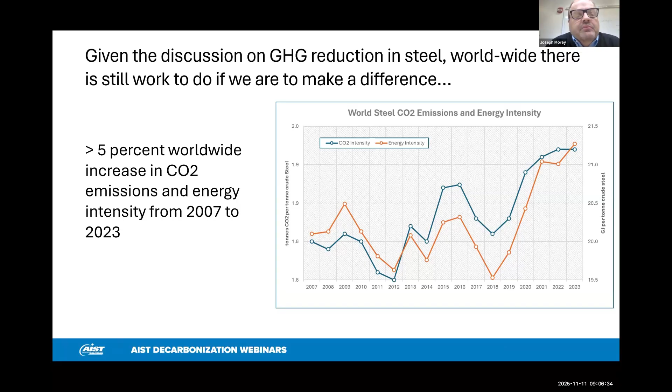Go to the next slide. So it seems that there's a strong blast furnace footprint for ironmaking. Over 70% of the world's steel comes from traditional blast furnace routes, and blast furnace capacities continue to come online.

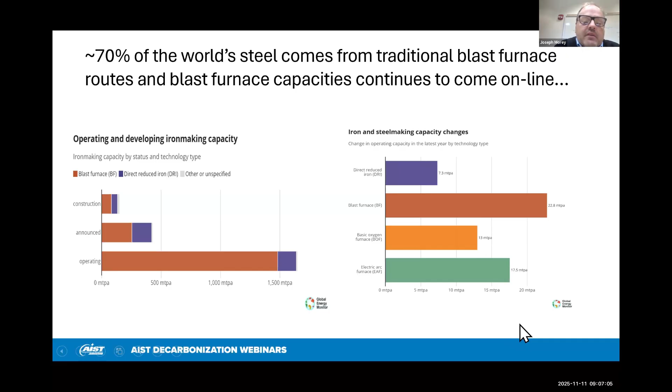Can you go to the next slide, please? As you can see here, in North America and Europe, blast furnaces are shutting down, and in parts of Asia, blast furnaces continue to come online, and it just continues to balance out at around 70%. That figure has been stable for the past 10 to 15 years.

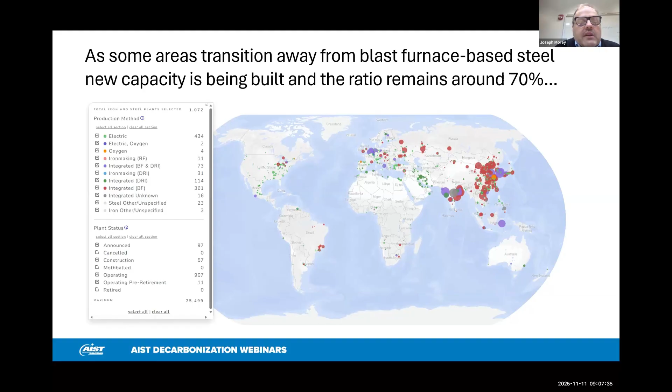Go to our next slide. So today, we're going to talk about the second part of our series where we talked about this pathway before. Now we're going to be focused on the boiler house, blast furnace, and steelmaking area on what exactly we can do to reduce our carbon footprint, which is the biggest lion's share of the carbon emissions.

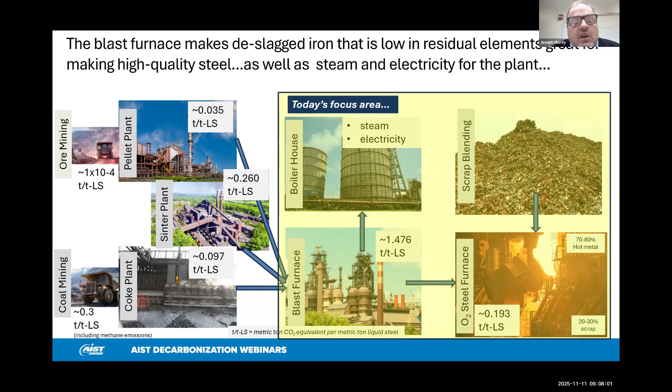Thank you, Joe. You summarized very succinctly the current dilemma that although we are looking at new processes that are going to be zero net carbon, the blast furnace process continues to predominate, and we need to do something about it right now rather than waiting for another 20, 30 years.

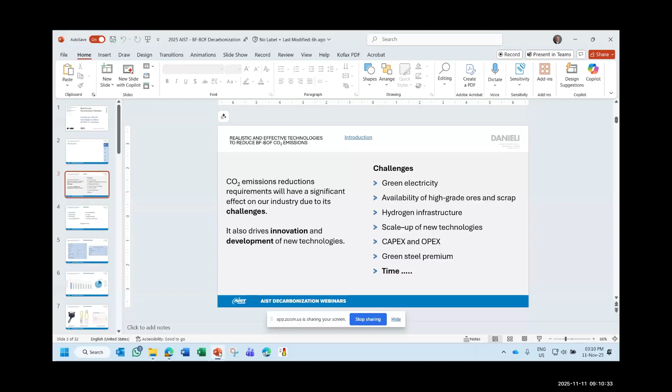Ladies and gentlemen, thank you for attending this webinar. I have the honor to share the first presentation today, Realistic and Effective Technologies to Reduce Blast Furnace and Basic Oxygen Furnace CO2 emissions. Within this first presentation, I will actually cover 5 different sections.

It's my pleasure to first start with a general introduction into the remainder of this presentation. I think we're all in agreement that any CO2 emissions reduction requirements have a significant impact on our industry, mainly due to their challenges. But at the same time, the silver lining is it also drives innovation and development of new technologies.

Nonetheless, I would like to summarize some of the challenges being faced by our industry for decarbonization, such as limited availability of green electricity, constraints in the availability of high-grade iron ores and scrap, and limited availability, if any at all, of hydrogen infrastructure. We cannot ignore the risk and challenge of scaling up any new technologies—this simply takes time in our industry. CapEx and OpEx economics, and also the green steel premium.

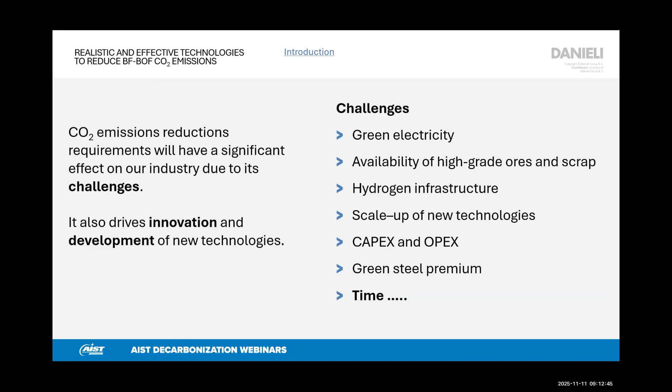And last but not least, as the moderators already explained, we are running out of time. We cannot wait for new emerging net zero technologies, but realistically this will take another few years. Within our organization, we are convinced that a significant part of steelmaking for the coming decades will comprise basic oxygen furnaces and also blast furnaces, which is why we are determined to assist the industry in decarbonization of blast furnace and basic oxygen furnace.

For this reason, we started an internal assessment a little while ago to assess the impact and effect of different technologies that could be used for decarbonization of blast furnace ironmaking and basic oxygen furnace steelmaking. For this purpose, we set up a rather comprehensive spreadsheet model, which includes all of the main facilities of a typical integrated iron and steel making plant, such as sinter making, pellet making, coke making.

Also ironmaking, either by blast furnace, but also potential new direct reduction plants on site or remote. Steelmaking by means of basic oxygen furnaces, casting. And the spreadsheet model also includes oxygen and steam, and last but not least, electricity and hydrogen.

Any usage of hydrogen does matter, because we have been assuming that any hydrogen would realistically be made by contemporary electrolyzers connected to the grid. The electricity grid carbon intensity these days is generally anywhere from 300, 400, 500, 600 grams of CO2 to produce 1 kilowatt hour. We cannot ignore those emissions, as there's simply not enough green electricity as we speak to service the steelmaking industry—maybe on the longer run using nuclear energy or other sustainable energies.

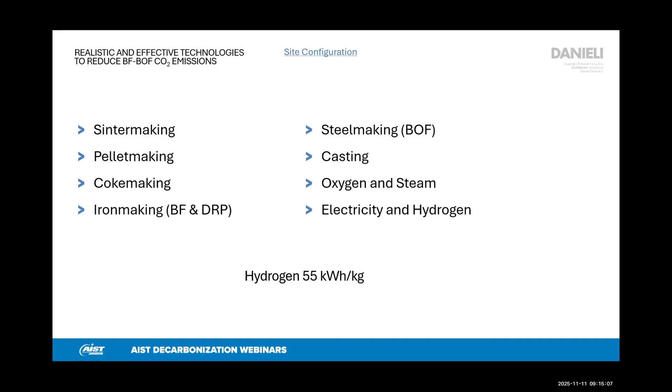That could be exported after some of this electricity is used within the plant. We have actually been looking into a typical large blast furnace with a coke rate of 340, a little conservative number, and a coal injection rate of 180. I would say the other key KPIs are rather reasonable.

Within the spreadsheet model, we've actually been using the detailed results of our thermodynamic blast furnace steady state heat and mass balance model. But we've also been assuming realistic constraints, as these are commonly accepted in our industry, on minimum coke rate, minimum top gas temperature, and RAFT for using PCI or natural gas.

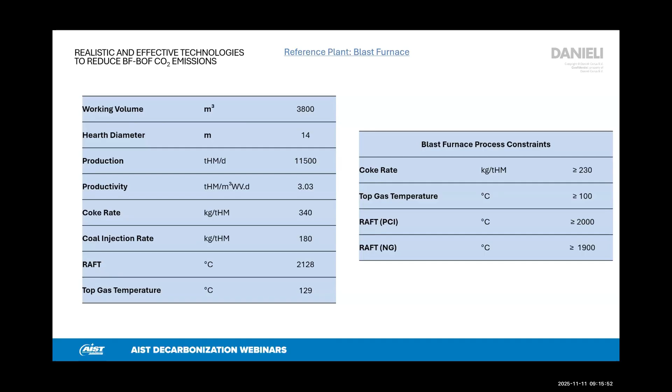If we would then add up all of the emissions of sinter making, pellet making, coke making, etc., then the total emissions of this reference plant would add up to a number of around 2067. And we need to knock down this number.

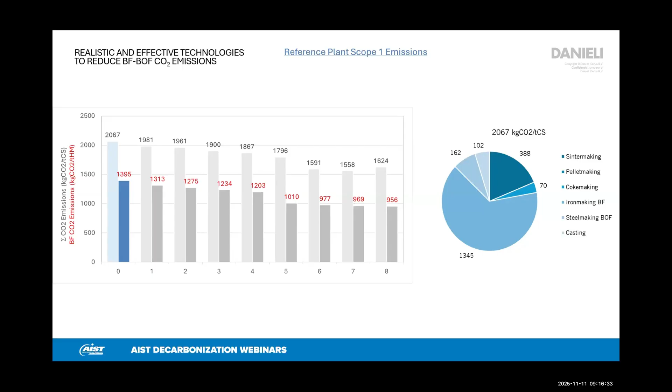Within the remainder of the presentation, we will take you along on our journey by analyzing 3 different technologies to reduce those crude steelmaking emissions to less than 1,600. By the end, I will also share a forecast, because that number could be even more reduced in another few years. How could the number of 2067 kilos of CO2 be reduced right away?

There are 2 methods to reduce these emissions right away. That is, first, to implement best available technologies. 3 such examples are summarized on this slide, which is a modern charging unit to reduce the coke rate by more optimum burden distribution and maximize the gas utilization.

The second is to adopt modern hot blast stoves with a hot blast temperature of 1,200 degrees centigrade instead of the more conservative 1,100 degrees centigrade. And last but not least, by implementing modern state-of-the-art automation level 2 systems, including, as an example, heat flux monitoring to reduce the heat losses by gas flow along the reactor.

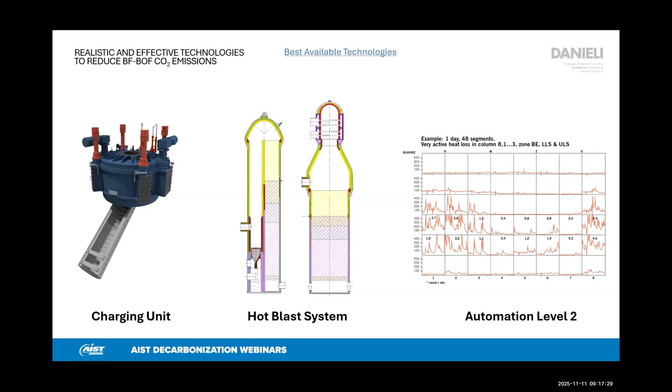Second, right away, the industry can further optimize efficiency and yield of blast furnace iron making and basic oxygen furnace steel making. Some 5 examples that we came across in steelmaking companies are summarized on this slide.

For example, minimizing the burden moisture and raw fluxes, maximizing the yield and recycling of fines and reverts, maximizing hot blast temperature also by using energy-saving tuyere stocks and tuyeres.

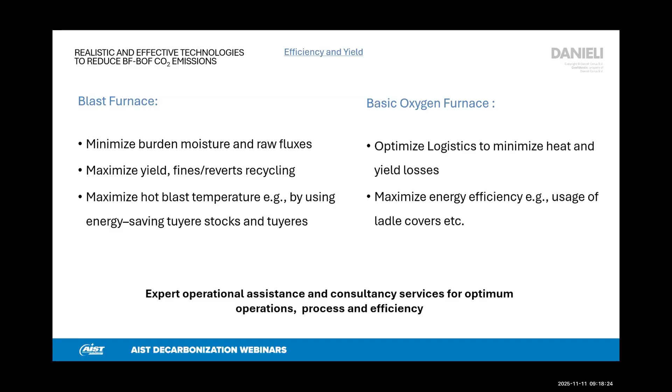And when we look into basic oxygen furnace, we have come to realize that many steelmaking companies could actually optimize their logistics to minimize the heat and the yield losses, and also to maximize the energy efficiency, for example, by usage of ladle covers. If the best available technologies and some efficiency and yield improvements are being factored in, then emissions will be reduced already by some 5%.

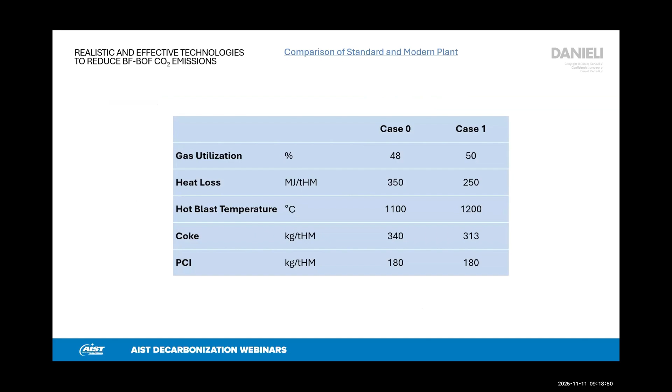As a result of improving the gas utilization, reducing heat loss in blast furnace, increasing the hot blast temperature, this will reduce the coke rate whilst retaining the PCI rate. And by reducing the coke rate, overall carbon emissions will be reduced to a level of approximately 1,981 kilos of CO2 for 1 ton of crude steel.

This modern reference steelmaking plant is actually a net exporter of electricity of around 134 kilowatt hours for each ton of crude steel, by nature of combustion of any excess blast furnace gas and coke oven gas, and use of that heat to generate export electricity.

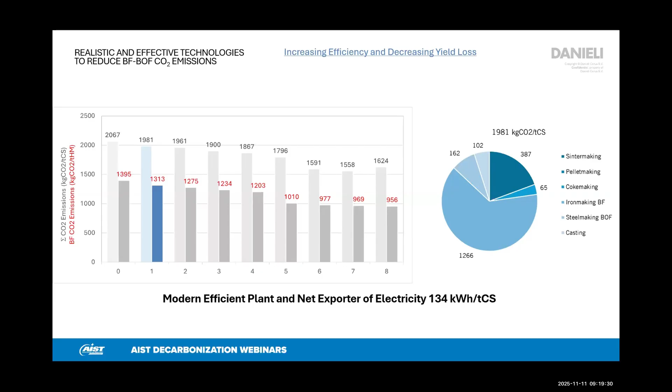Now, let us look into one potential technology to reduce the CO2 emissions, which is usage of gas injection. We have been analyzing 3 different types of gas injection.

The first, already practiced in the United States, also in Russia and 1 or 2 other countries. We could look into usage of natural gas, and we've been assuming this is constrained by a maximum amount of approximately 100 kilos per ton of hot metal, and it would actually rule out usage of PCI.

Second, we've been assessing the impact of using coke oven gas instead at a moderate rate of 40 kilos for 1 ton of hot metal, and another 180 kilos of PCI. You may wonder, why 40?

Well, we have come to realize that the availability of coke oven gas on its own is limited by the coke making plant. Some coke making plants may produce more coke oven gas, others may produce a little less, but we believe that a moderate average number for our industry would allow usage of approximately 40 kilos of coke oven gas for each ton of hot metal, as we also need to use minor amounts of coke oven gas for enrichment in hot blast stoves, but also for heating in the reheat furnaces.

We've been looking into usage of hydrogen, and we have been assuming a moderate, reasonable rate of some 20 kilos of hydrogen for 1 ton of hot metal. Two industrial plants in our industry have already demonstrated usage of hydrogen in excess of 10 kilos on industrial facilities, and experimental blast furnaces have demonstrated capability to inject much higher levels, even beyond 40 kilos. But there are some setbacks of doing this on the heat balance, so we've been assuming a moderate amount of 20 kilos.

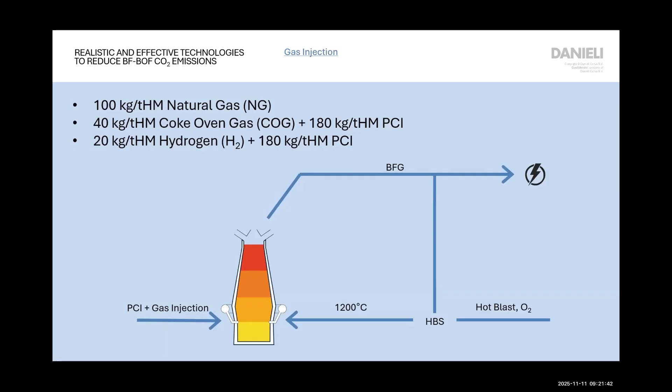Let us first look into the KPIs of the blast furnace when comparing natural gas, coke oven gas, and hydrogen. The coke rate for injection of natural gas is relatively high because we nullified coal injection rate to allow maximum usage of gas. The coke oven gas coke rate and the hydrogen coke rate are less than our reference blast furnace, meaning CO2 emission reductions will be accomplished. For reference, the reference blast furnace plant had a coke rate of 313 kilos.

More interestingly, let's look into the impact to the electricity balance. The potential export of electricity will double when injecting natural gas, because more blast furnace gas at a higher calorific value will be produced. The export of electricity will be reduced to only 32 kilowatts when injecting coke oven gas, because there would be no more coke oven gas for combustion in the power plant to produce electricity. Far worse is actually the electricity balance when injecting hydrogen - then we would need to factor in usage of more than 800 kilowatt hours to produce 1 ton of crude steel by means of injecting 20 kilos of hydrogen.

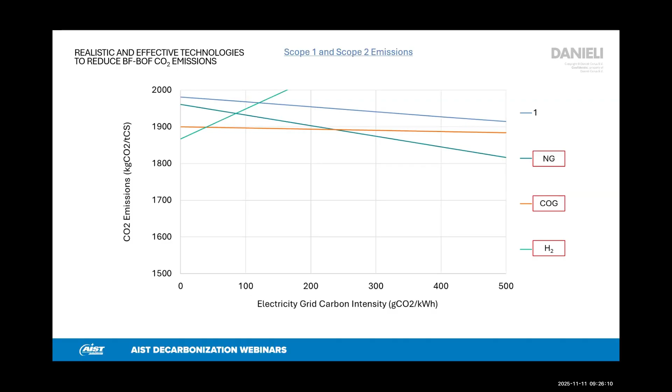Let's look into another group of technologies which includes charging of metallics in the blast furnace. I deliberately refer to metallics. What are metallics? Metallics could be DRI, HBI, even scrap. Metallics could also include briquettes if they are mainly made up of iron reverts.

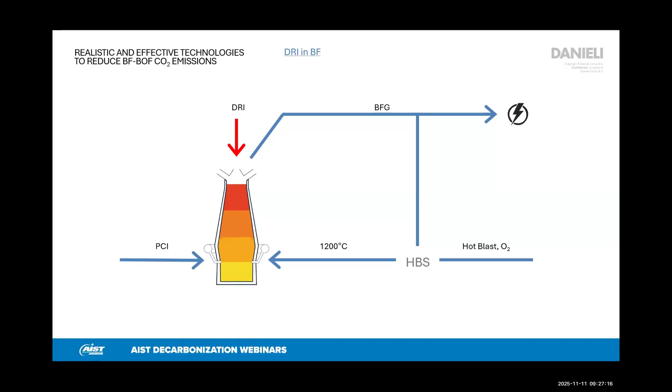We've been looking into different scenarios of charging metallics in the blast furnace, and within this presentation we will focus particularly on charging DRI. The examples I'll share in the next few slides assume 30% of the burden comprises DRI. There's a good reason to limit this number to 30% - we've also made calculations for 40% and beyond, but I will explain later why we've been looking into the 30% scenario, as we believe this is the most realistic these days.

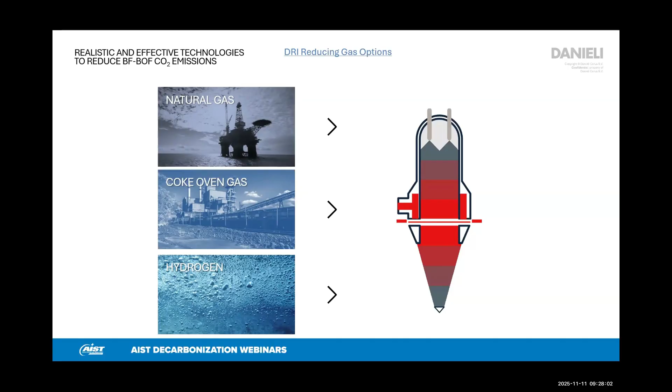DRI is made in a direct reduction plant, as we're all aware, and most DRI these days is actually made in shaft furnaces, which could include, for example, Midrex technology. This technology could use either natural gas, coke oven gas, hydrogen, even syngas, and I would say any blend of those gases. For simplicity, we are ignoring the usage of syngas, so in the next few slides we will only look into using either 100% natural gas, 100% coke oven gas, or 100% hydrogen.

Usage of coke oven gas for the production of DRI is actually not new. I would like to bring two examples to your attention. Those are two of the most recent industrial demonstration plants, which were commissioned and are currently operating in China to produce 0.5 million tons of DRI per year and 1 million tons of DRI per year using coke oven gas. So the usage of coke oven gas to produce DRI on its own is not new, but the industrial scale is emerging fast in China as we speak.

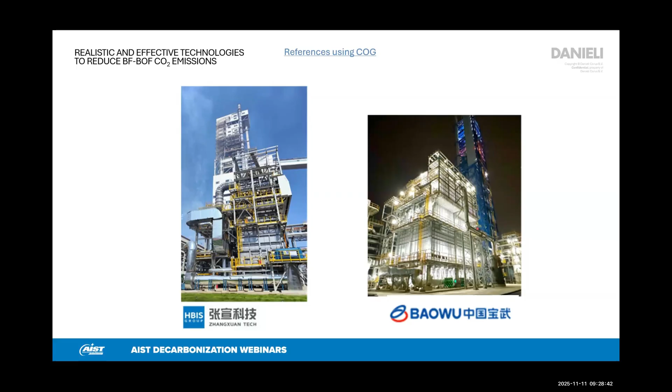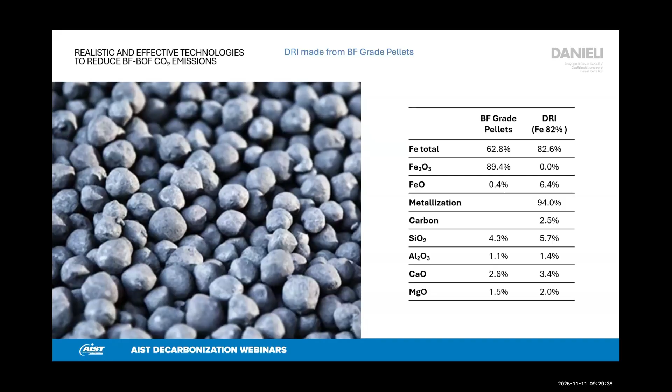We know that high-grade ores are limited in availability, so ideally our industry would use lower-grade ores. This is actually very attractive when charging this DRI in the blast furnace. We have been looking into the usage of BF-grade pellets to produce a DRI with a lower iron content, compared to an alternative scenario using DR-grade pellets, which would produce DRI with an iron content of more than 90%. So this DRI is, I would say, sort of low-grade DRI. It has moderate metallization, but a relatively high amount of gangue components. We can charge this in the blast furnace because the blast furnace is the ideal smelter.

Let us again look into the KPIs of the blast furnace when charging either DRI made by natural gas, DRI made by coke oven gas, or DRI made by hydrogen. You can see a coke rate reduction similar for all three scenarios. We reduced the coal injection rate somewhat, mainly because we would then produce a little bit more coke. We also didn't want to violate the lower limit to the coke rate, which I already shared before. The more coke we charge, the more coke oven gas we could produce, and this balances out to the 30% I've already mentioned. So if more coke oven gas were available to the industry, the 30% we've been assuming could be raised to 35, 40%, even beyond. But in reality, there are limits to the availability of coke oven gas.

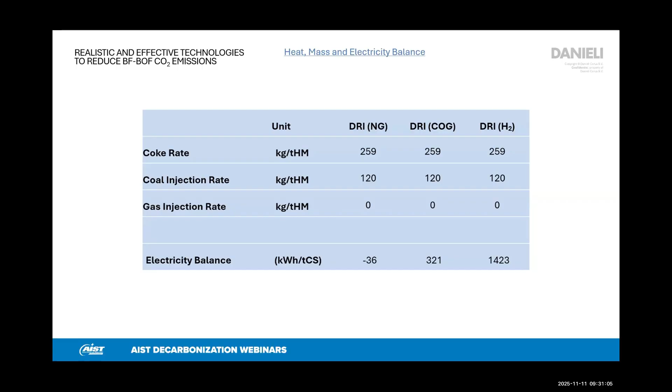If we look into the electricity balance, it's still a minor export when DRI is charged using natural gas. We need to import electricity when the DRI is made by coke oven gas, because all of the excess blast furnace gas would be used for the direct reduction plant process gas heater. But the amount of electricity needed when using hydrogen is really very, very significant.

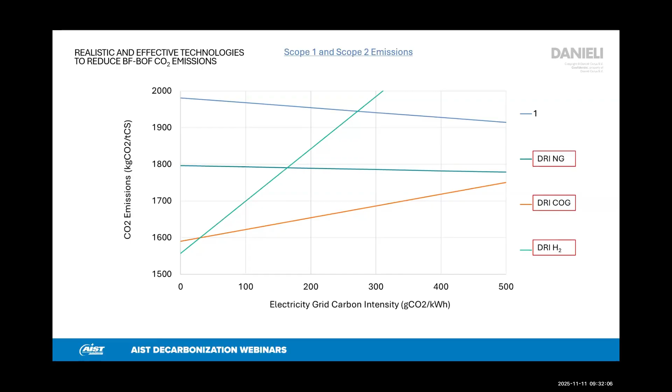Last but not least, we have a few minutes left. I would like to make a simple comparison to alternative top gas recycling technologies.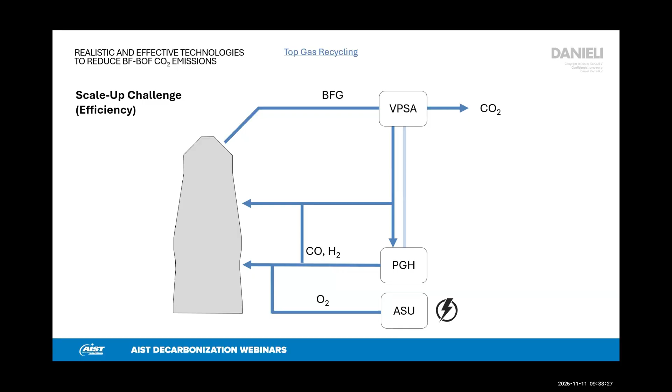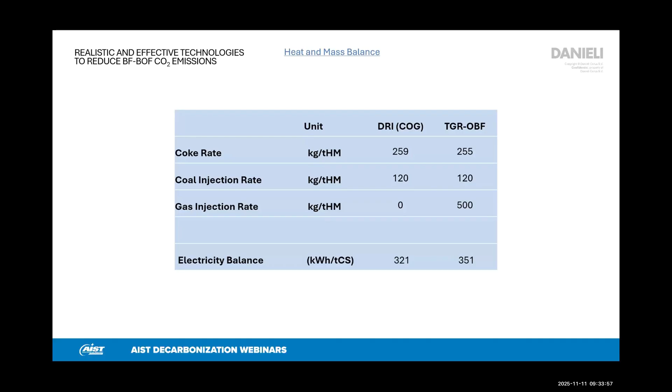Until top gas recycling is demonstrated on industrial scale, we cannot reliably predict its efficiency, so we've assumed a moderate efficiency as reported in the industry. Comparing the KPIs of the blast furnace and electricity balance, the coke rate of the 30% DRI option made by coke oven gas and the top gas recycling option were comparable. The electricity balance was also somewhat comparable, and the CO2 emissions for scope 1 and scope 2 were also comparable. We believe charging DRI using coke oven gas or top gas recycling oxygen blast furnace have similar impact on reducing CO2 emissions.

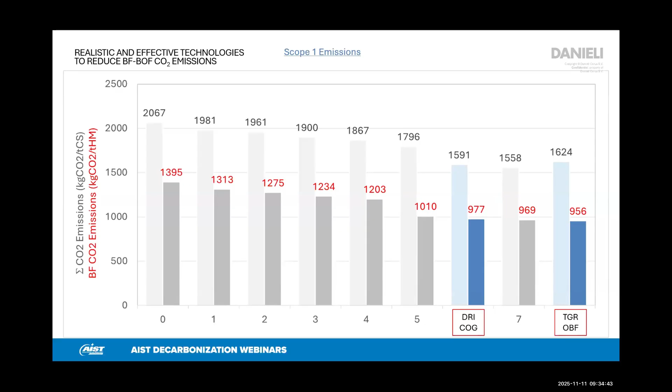But charging the DRI is already demonstrated on industrial scale. There's no new technologies, no scale-up risk, whilst those do exist for top gas recycling oxygen blast furnace. This is the main reason why our current strategy focuses on charging DRI, although we are not ignorant of the potential of top gas recycling oxygen blast furnace.

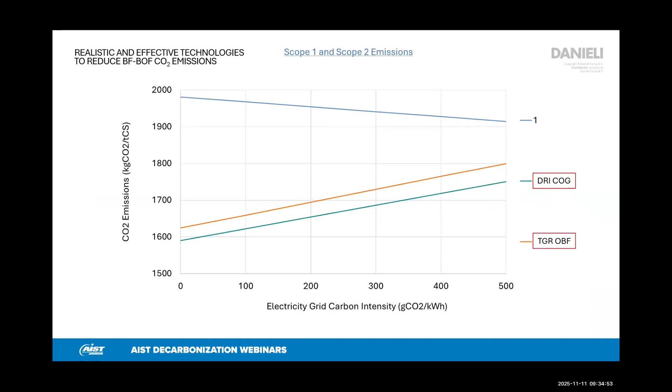We can also compare the scope 1 and scope 2 emissions, and the two lines are somewhat comparable. I'd like to end this presentation with some conclusions. We believe that realistic and effective technologies must be deployed right away, if not in the next 3, 4, 5 years. Those should include application of best available technologies, maximizing efficiency, maximizing yield.

Second, if gases would be injected into the blast furnace, ideally coke oven gas would be injected to reduce CO2 emissions. Third, more significant emission reductions could be achieved by charging DRI made using coke oven gas and also using low-grade iron ores. This altogether would actually rule out the need for hydrogen.

There's no risk in scale-up. We can use low-grade iron ores and continue to produce high-grade steel in the basic oxygen furnaces. This is why I believe these are realistic solutions to reduce emissions.

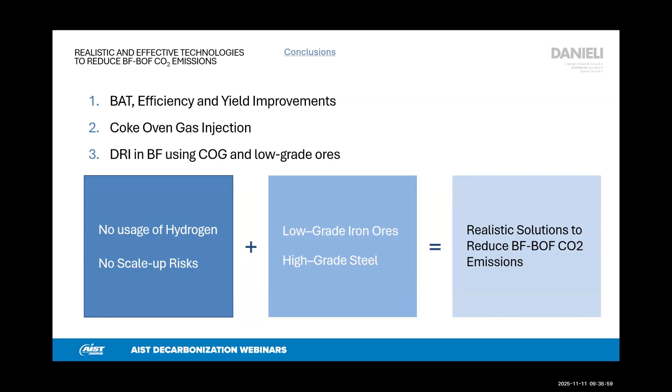Last but not least, I've just been sharing a few examples. In reality, we're already aware of the potential of raising metallics in the blast furnace to 40%, as demonstrated in Japan as we speak. We're also looking into maximizing metallics in converter steelmaking to 40%. If we add one to the other, an overall CO2 emissions reduction of 40% could be accomplished. There are some other trick cards we could add to reduce those emissions to less than 1,000.

This is a very good question, I can only give a very generic response. Any technology we've come to realize will raise the cost of crude steel. That is only feasible if either CO2 emissions would be penalized or if CO2 emissions reductions would be awarded by a green steel premium. It's not yet entirely clear to us which of these technologies would be most economic. For sure, investment into top gas recycling oxygen blast furnace and all the auxiliary plants is somewhat comparable to investment into a new direct reduction plant, which is a mega number. Capital investment into any gas injection technologies is, I would say, rather moderate. I hope that answers the question for the moment.

Thank you very much, Joe. Thanks everybody at AIST for organising this. I will see if I can get the video going. Good, you should be seeing the full screen now.

So, yeah, as I say, thanks to everybody. Gerald and I will be presenting on BF and BOF decarbonisation with an emphasis on what can be done from a CO2 perspective, but also trying to give it an economic viewpoint without breaking any rules of sharing information we're not allowed to share. We'll try our best not to repeat previous webinars, but I guess not surprisingly there'll be some alignment with today's presentation from Reinoud—a bit of corroboration, perhaps.

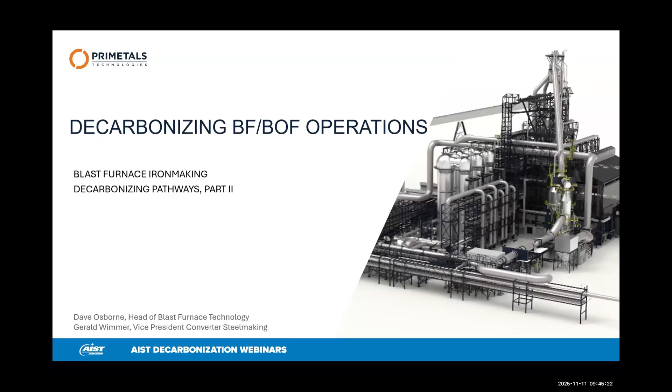So I'm going to start the presentation. I'm going to talk about the blast furnace, then I'll shift across to Gerald, and he'll talk about the BOF. Then we've got a summary slide at the end that I'll come back to.

So slide 1 is remarkably similar to one of Reinud's previous slides, so I won't dwell on it, but just to re-emphasize that the blast furnace is the big emitter in the liquid steel route, and is therefore both a challenge and an opportunity in the short term.

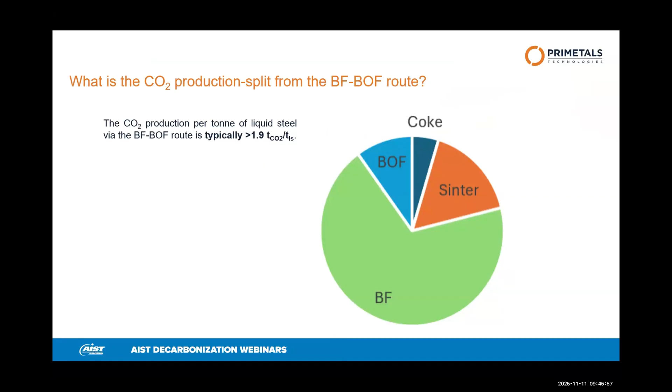While preparing for this webinar, one of the questions Joe Morey asked us was, what is a good blast furnace? I had to think about how to answer that. For me, some operators will be lucky enough to have very modern furnaces with the latest facilities and benefits I'm going to talk about, but most people listening will probably have older existing assets and might be asking what they can do. So I want to talk about not what is the best technologically available blast furnace, but what helps with OPEX and CO2.

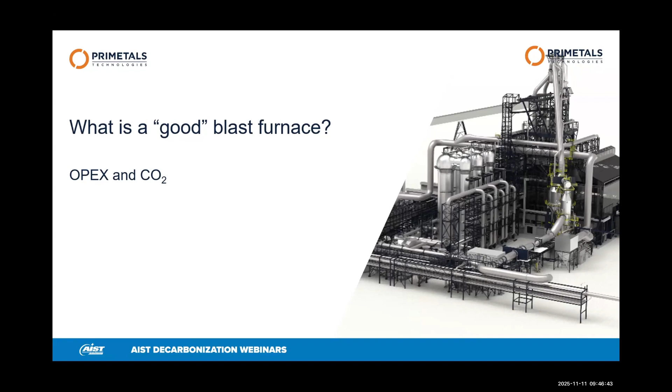So what is a good blast furnace? I made a list of some items. But first, what does a blast furnace do? We have to be honest, the value add in the blast furnace is nothing like the downstream technologies.

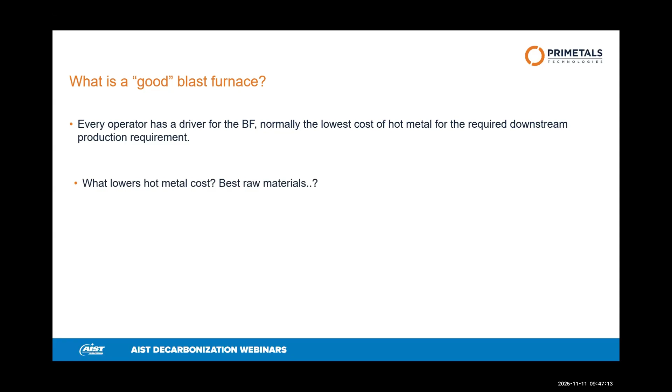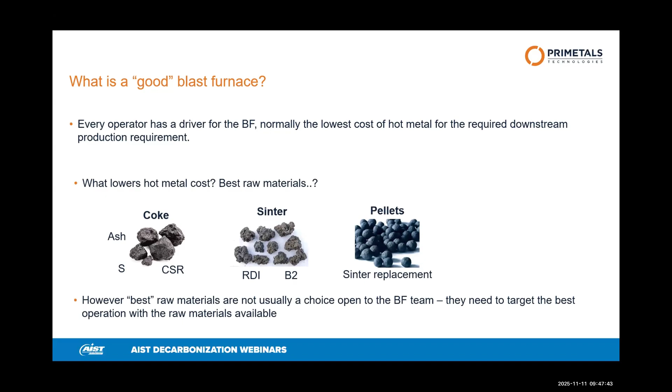So what we're normally trying to do is produce the lowest cost hot metal for use downstream. What lowers hot metal cost? Best raw materials, clearly. Can I have the finest coke? Can I have the world's best sinter? Can I have the best pellets, etc.? But frequently the best raw materials are either not a choice open to the blast furnace team, you're at the vagaries of the procurement team, or available qualities are coming down. So what we need to do is target the best operation with the raw materials available.

The next slide talks about some technological activities which can be used to both reduce hot metal cost and CO2. I won't go deeply on this slide - I've got another slide where I'll talk them through more - but it's not an exhaustive list, I'm sure. These items, if utilized correctly, are all going to help reduce your OPEX. Because such a large percentage of the cost of running a blast furnace is the fuel, the carbonaceous fuel, most of these activities - in fact all of them in this case - are going to bring the CO2 level down as well.

So: maintenance to maximize your availability and minimize the time when the furnace isn't running efficiently. Bellless top for burden distribution. Level 2 optimization system, blast temperature, maximizing your blast pressure, or top pressure, within your available constraints. Top gas energy recovery turbine, the TRT, if you've got enough pressure. Avoiding gas flaring, and the SIP oxygen pulsing, which I will explain briefly later on, a relatively new technology.

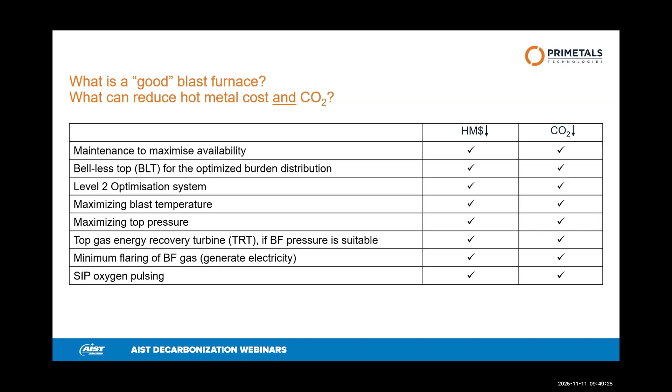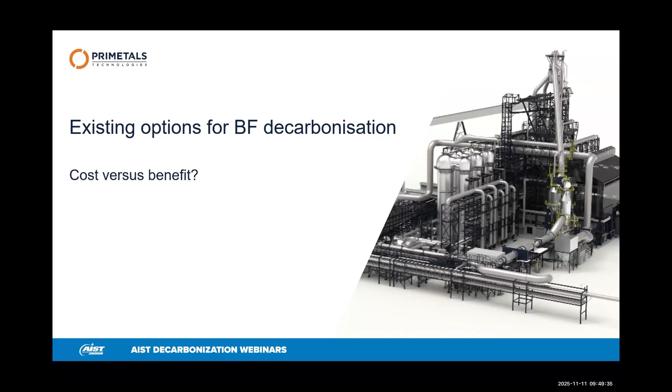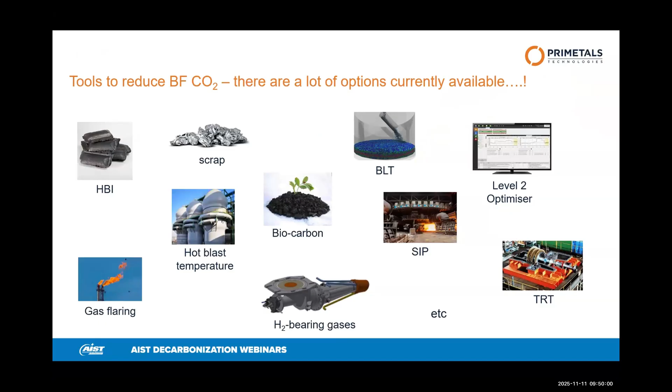What's important, I think, is then to talk about them individually and maybe try to rank them. And in trying to rank them, how do you do that? So I've put a series of technologies on the left-hand side here, and I'm going to, again at a high level, try to rank them on OPEX, operational cost, CAPEX - that's the capital expenditure - CO2 benefit, and then some comments on the side.

The one that seems most obvious from a cost benefit solution is the Level 2 system, an optimizer for BF operations. Will it decrease OPEX? Of course it will, yes. What is the CAPEX for it? You can see I've been very careful with how I've described CAPEX - I've called it very low. Everything else in my list is going to be either low or medium.

When you're looking at a particular plant and the cost of the modification - and I'm thinking not the cost that the OEM is going to sell you the technology for, it's the project cost for implementing it, what the steelmaker pays - so in my mind, low is in the region $1 to $10 million, and medium is in the region $10 to $20 million. These are indicative. Level 2 is at the bottom end of low, so I'm going to call it very low. Depending on your starting point, we see a CO2 benefit of something like 2.5%. So that seems to me absolutely the no-brainer.

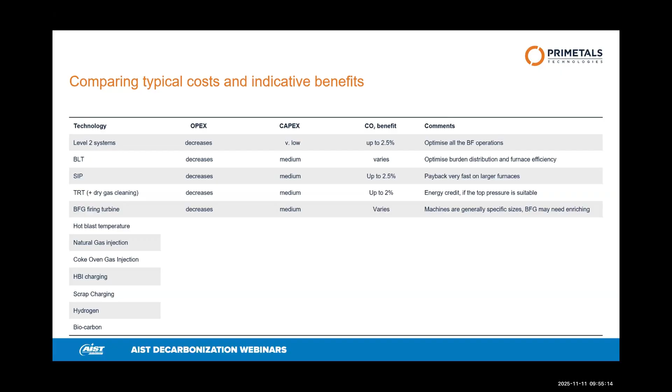For those probably few people out there who flare all or part or most of their blast furnace gas, then the opportunity to install a blast furnace gas firing turbine exists. Again, a medium CAPEX, but something - if you are wasting blast furnace gas, then you're going to generate electricity. So again, probably a niche technology, but worth putting on the list.

The benefits of hot blast temperature increase, I guess, are probably well known to most or all of you listening in, and there are all sorts of solutions to improve the hot blast temperature depending on your starting point and the age of your facility. So whether it's in the stove itself or whether it's by replacing your tuyere stocks with energy-saving tuyere stocks to give you that little bit extra blast temperature at the tuyeres, there's a huge range of solutions which can be considered there.

Which is why I've said the CAPEX can vary from, I guess, virtually nothing for a quick study to tell you what you might be able to do, to relining an entire stove, if that makes sense. But 100 degrees C - and apologies, I'm only working in Celsius in my world - so 100 degrees C hot blast reduces the fuel rate by, let's say, 10 kilograms. So there's significant potential for hot blast temperature.

Gas injection, so hydrogen-bearing gas injection, which could be natural gas, coke oven gas, hydrogen, or some sort of synthetic gas - but we'll start with natural gas. It really depends where you are in the world. I guess if I'm talking to a lot of people based in the USA, then you've already got access to low-cost natural gas, and I don't need to explain the benefits to you.

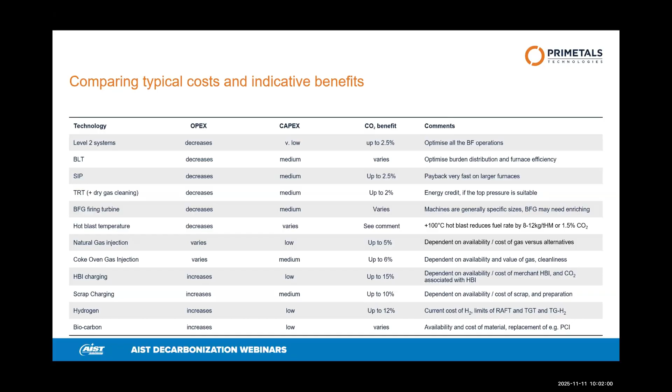A very quick introduction to SIP technology, because this isn't meant to be a promotion, but just in case you weren't aware of it, and it's on my list of opportunities.

So sequence impulse process is an oxygen pulsing technology developed by ThyssenKrupp in Germany on their blast furnace number 1 at Schwelgern, Duisburg. And the oxygen pulse is used to clean out the back of the raceway, the bird's nest. Particularly, I guess, with PCI char, which is obviously a challenge for any furnace with PCI, but not a challenge for furnaces without PCI. But combusting, burning out the very small coke particles as well is what the technology can do.

And by doing so, you're both extending the raceway and cleaning out the back of the raceway to allow gas further into the blast furnace. And one of the benefits that leads to is an ability to reduce your coke chimney size. And by reducing your coke chimney size, that means that your CO utilization can be increased, maybe by order of magnitude 1.5%. And that means that the furnace runs more efficiently.

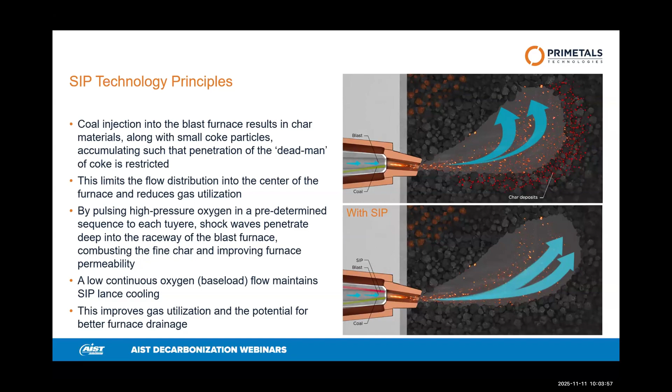But the technology has also been proven to allow you to inject more PCI than you had been injecting, and by definition to reduce your coke rate by similar amounts.

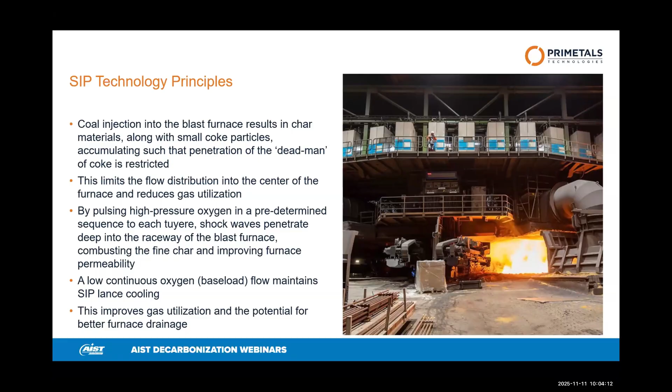Picture of the plant at Schwelgern. And as you can see, the top of the picture, there is a pulsing box for each tuyere.

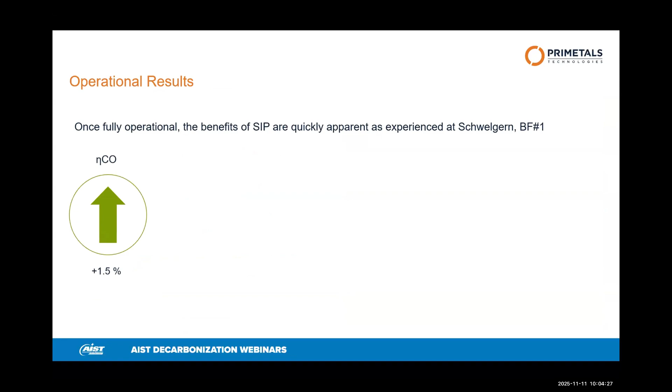What does it mean? This is what was seen at Schwelgern. As I said, ETA-CO, the efficiency of carbon utilization up, coke significantly down, coal up, fuel rate down, CO2 down. Again, an incremental CO2 reduction, but the coke saving, where coke is your most expensive fuel, can and does lead to return on investment of maybe 2 years for a project, and Primetals are currently building the first SIP plant outside of Germany in India on a 5,000 cubic meter blast furnace.

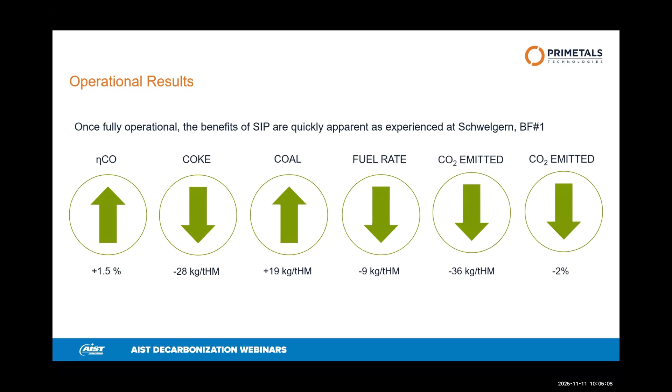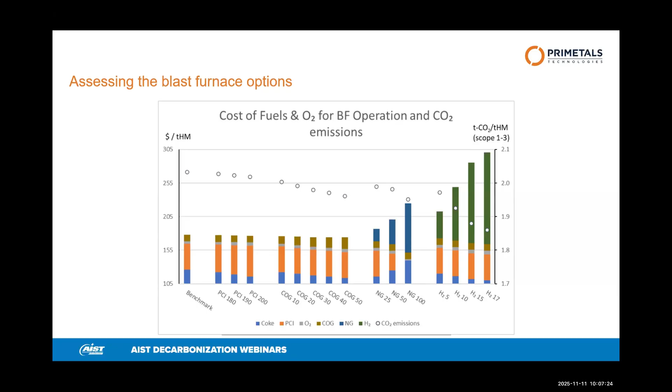So you can then start to align the OPEX change with the CO2 change, and the bit that's missing is the return on investment, which is where you're going to have to talk to technology suppliers, equipment suppliers, and take a view. But for me, this is step one in determining which of those technologies might make sense for each of you out there operating an integrated steel plant.

I'm now hopefully going to hand over to Gerald. Yes, you can, Dave. Tell me when to change the slides.

So we discussed the BF-BOF route. We thought it's worth spending some time on the BOF route, the second step of this process. We discussed a bit about metallics, how metallics input is changing the CO2 emission. And as we see on the next slide, this is exactly the lever we have on the BOF converter.

On the BOF converter itself, we cannot do that much to reduce the CO2 emission. We need some carbon in the BOF for heating, for metallurgical reasons, to remove the phosphorus, to purge out the nitrogen. But we have a lever by selecting the input material.

As you can see on the very right-hand side of this diagram, we see the typical materials we can charge into the BOF converter, like hot metal, DRI, and the related CO2 emissions. And we see, as already discussed, hot metal production via blast furnace needs a lot of energy, which is mainly carbon. That's why hot metal produces a lot of CO2, compared to scrap on the very right, which has zero carbon, zero CO2 footprint by definition.

So by varying the scrap mix in the BOF converter, we can reduce the overall CO2 emission by reducing the hot metal ratio, shown in the diagram in the center. Here we have the CO2 emission of the route, blast furnace and BOF converter, total CO2 emissions as a function of the scrap rate.

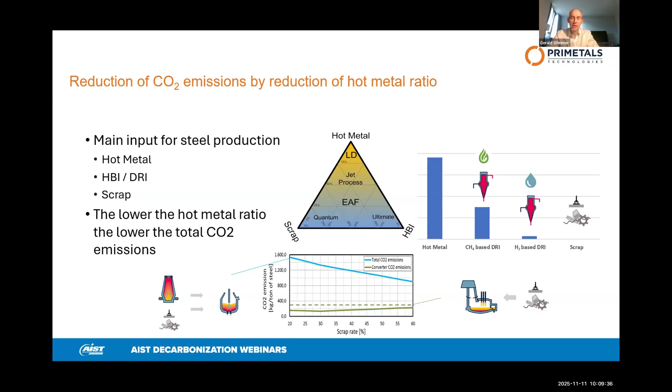We have the converter process where we have to ensure sufficient mixing and melting energy. And last but not least, scrap quality. There's a topic with trace elements in the scrap; if we use more scrap in the converter, we have to be careful to keep within limits, for example for copper and tin, in our final steel.

To melt more scrap, we need more energy, so we have to keep this energy balance: what we take in and what we take out. We can work on this energy balance by bringing additional energy, for example by scrap preheating, by additional post-combustion, or simply by better process control to reduce energy losses, by better logistics, and by eliminating the cooling agents still used today in converter steelmaking.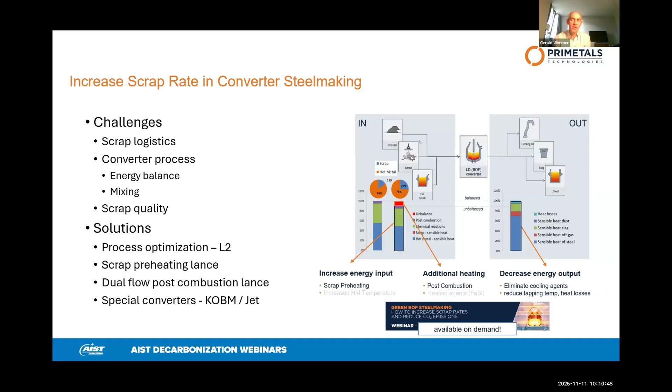Some examples of these tools to increase energy supply and therefore the scrap rate we can see on the next slide. We can see some of these levers here - on the very left-hand side, the scrap preheating lever, where we can preheat the scrap before charging the metal.

Such a system, for example, is used by Voestalpine Donawitz. They have two small blast furnaces; when one of them is in relining or maintenance, they are short on hot metal and have excess time on their converters.

So that's a good trick to use this time for scrap preheating. If the scrap is hot, it takes less energy for melting later during the process, and as a consequence, you can melt more scrap with the energy available in the hot metal.

In the converter, we combust carbon, but not very efficiently - we just combust it to CO. That's why the converter off-gas has high calorific value and is collected and used in the gas holder. Another way to use the calorific value of this gas is to do post-combustion to CO2 already partly in the converter.

This is happening in our process standard-wise to 10%. So if we increase the so-called post-combustion ratio to 20 or 30%, we can increase the scrap rate again by some 5%. And last but not least, we have to minimize the energy losses.

This is best done by having accurate logistics and accurate process control, and process models are very helpful here. The process model allows upfront calculation of the heat with an accurate energy balance. Then we know precisely how much energy is available and how much scrap we can process with this energy, so we can order the right amount of scrap and charge the maximum scrap amount possible. All in all, these tools allow a standard BOF converter to increase scrap rates to some 25%.

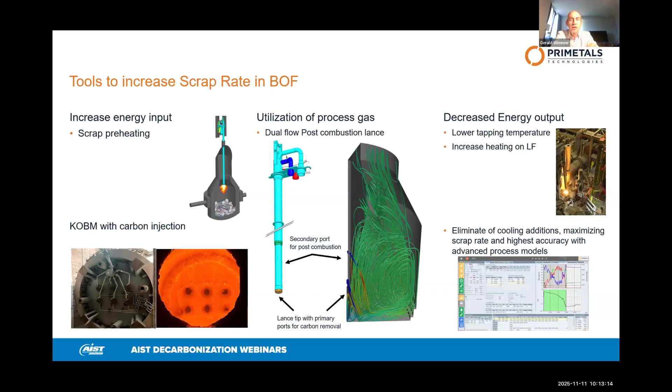We see interest in this technology now for a green transition of the integrated route to maximize the scrap rate. Now the combination - what we can achieve if we combine reduced CO2 emissions per ton of metal with the higher scrap rate in the BOF converter - Dave will show us on our last slide.

Well, this is the penultimate slide. Thanks, Gerald. So the final slide will demonstrate just in one picture what can be done today without excessive capex, without hopefully extending your OPEX, keeping you competitive.

I've picked a blast furnace based on PCI. I've assumed its current situation is 100% CO2 with 10% scrap. There are things you can do to get down to 90% CO2 or 80% CO2, whether it's a PCI-run furnace or a different fuel like natural gas. Other tricks are there to bring the CO2 down from the blast furnace.

As Gerald says, in order to reduce the overall CO2 per ton of liquid steel, increasing the scrap rate is part of the solution. I haven't tried to demonstrate the best available figures here - I've tried to make it believable, meaning that if you could get to 25% scrap, for example, you'd be able to do better than the 75% or 25% reduction

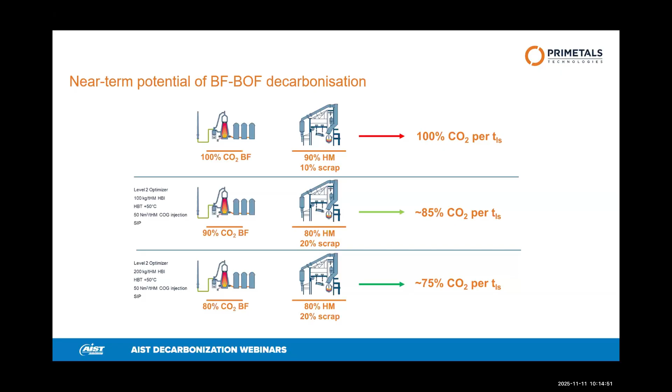through the integrated route. And that's the final slide. So thank you very much for listening, and question time.

That was great, guys. Thanks for the presentations. Those are really a nice little menu of things that you can do to kind of get things going today, which is helpful for everybody, I would think.

I have a question from Andre Oliveira. He asks, excellent presentation. Has the SIP condition with multiple injections been simulated? For instance, PCI natural gas, or PCI and biocarbon?

Thanks for the question, Andre. It's something we're working on at the moment. The benefits of SIP and gas injection will probably be a little less than if you're injecting PCI, because you haven't got the char at the back of the bird's nest. But it is something we need to model, and something we're actively trying to understand, not only for the US market potentially, but for other people who might have access to lower cost gases.